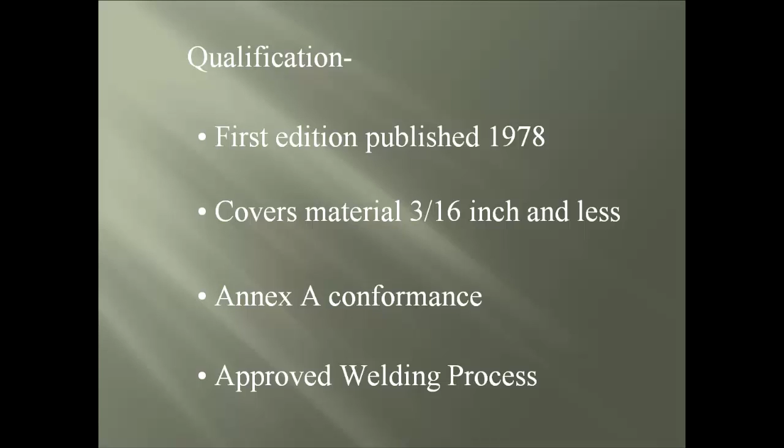The electrode for shielded metal arc welding process shall conform to the AWS A5.1 specification for carbon steel electrodes and the AWS A5.5 specification for low alloy steel. Now, if any other electrode specification is needed to be used, it must be approved by establishing a PQR.

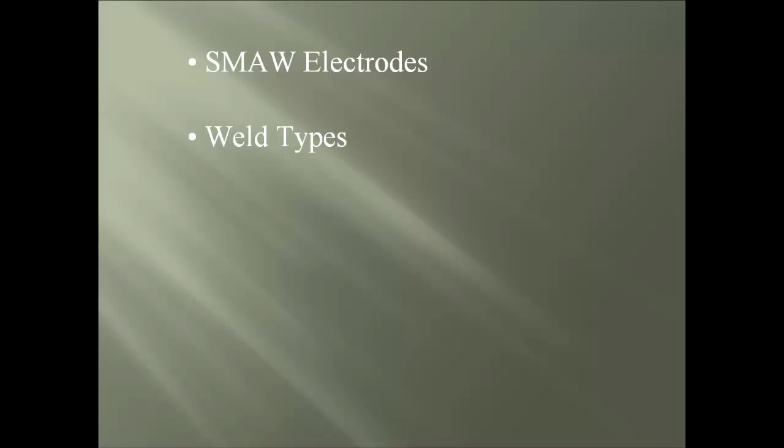The following weld types are approved: the square groove in a butt joint, fillet welds in a lap or T-joint, flare groove, arc spot, arc seam, and arc plug. The way to match the correct filler metal with the base metal being used is found in Table 1.2.

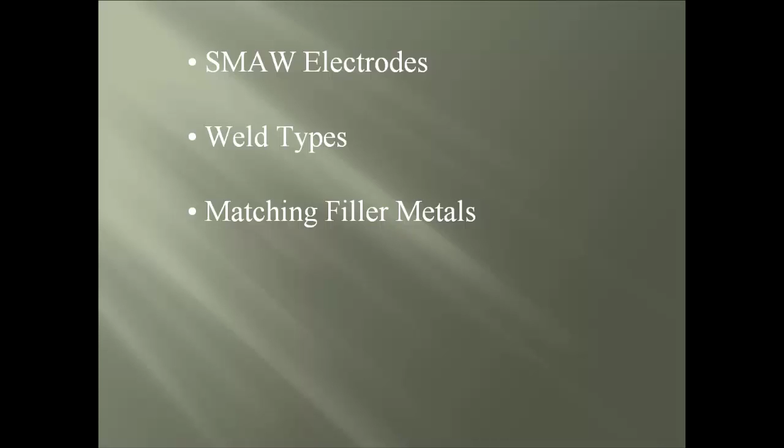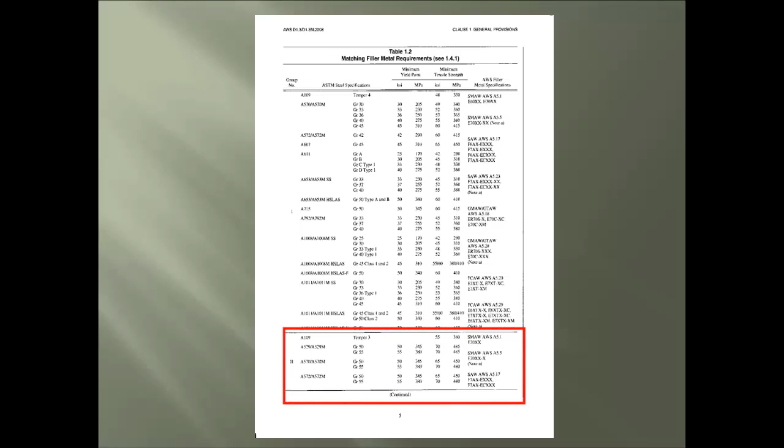Here we see the AWS Table 1.2, and we will take a closer look at this section of the table. The QC and QA professional needs to understand that these two parts of the table must work together for finding the correct information. So first is the grouping callout. And with the closer look, you see we are in group number 2, which is how the base metal is sometimes referred to.

Next, we see the actual base metal specification plus the grade for this group 2. Now a quick tip. You might have seen the same base metal found in another grouping, but slow down and check the grade, which will be different.

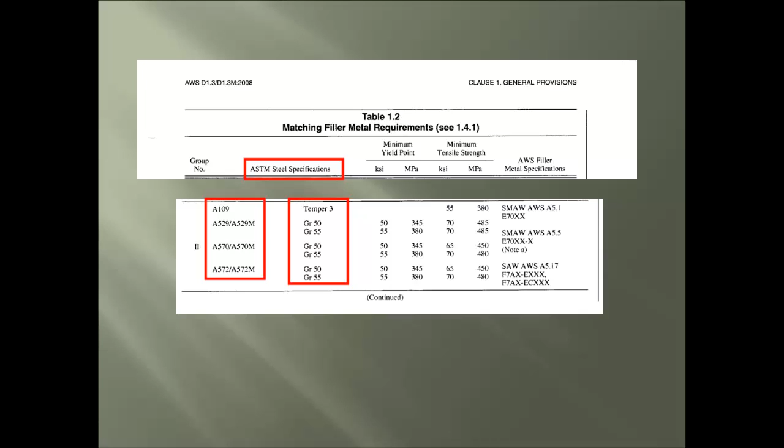Next is the two areas that cover the minimum yield point providing the KSI, which means kips per square inch, and the MPa, megapascals, numbers. And then the minimum tensile strength, also providing the KSI and megapascal numbers. And lastly is the filler metal specification and classification that is approved to be used with the base metal within this group 2.

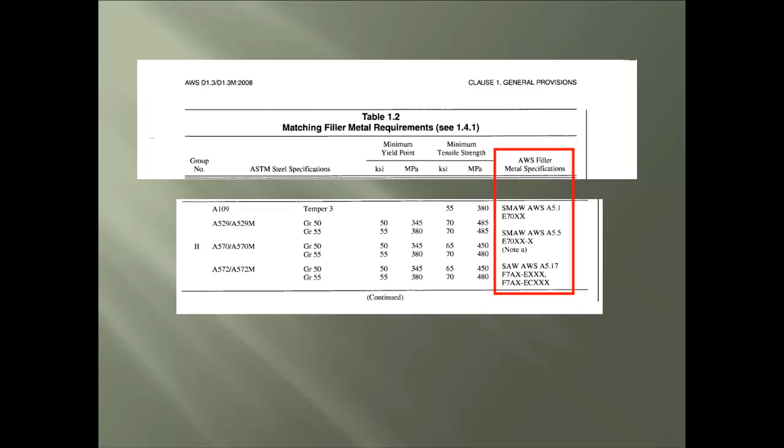Now let's cover some minimum and maximum for welding of sheet metal. First is the minimum length for a fillet, flare bevel, and flare V groove weld, which is 3/4 of an inch. Second is the minimum leg length of a fillet weld for a lap joint or T-joint, which is the thickness of the thinnest material used.

Third is the minimum fusion surface of an arc spot and plug weld, which is 3/8 of an inch. Fourth are the weld washers, which should be within 0.05 to 0.08 thickness. Fifth is the minimum width of an arc seam weld, which is 3/8 of an inch.

As we covered earlier in the seminar, a pre-qualified WPS is a written living document that includes the recorded values for each variable approved by the D1.3 code that will produce a sound weld assembly. Now, when the contractor does this, it's defined as exempt from a qualification test as long as the assembly is between sheet steel to sheet steel or sheet steel to a structural member equal or less than 3/16 inch in thickness. And if any deviation from the joint details approved by the AWS committee happens, this will have the proposed WPS needing engineer approval before production can begin.

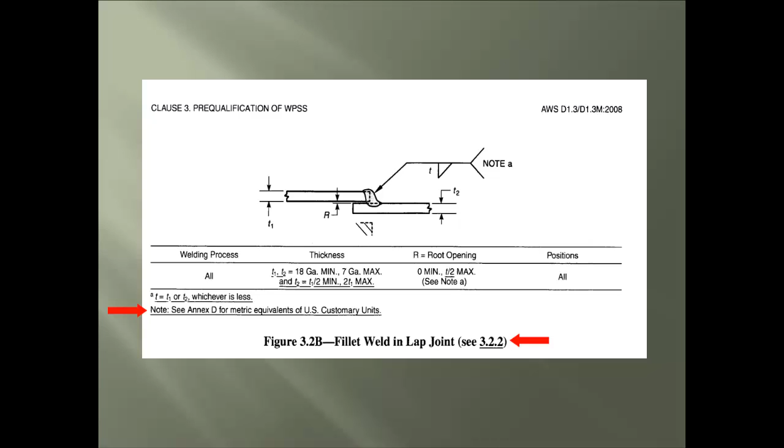Now we see even using a small detail like this, you must be heads up for any notes provided. And we close with the actual figure heading, which we see the numbers of 3.2.2 in parentheses. And this refers you back for a better explanation within the code for this joint detail.

Okay, we just reviewed the pre-qualified WPS, but remember, even with sheet steel, there are the PQR and WPS qualified by testing. Once again, the WPS qualified by testing is a written living document for each type of weld, which must comply with the AWS D1.3 code requirements, plus be accepted by the engineer of record. And the PQR is also a written living document that records the actual values used to establish the WPS qualified by testing.

Another quick tip: the melting rate data of a shielded metal arc welding electrode that is provided in the D1.3 code commentary may be used as a measure of welding current for both the WPS and PQR. Table 4.2 of the D1.3 covers the PQR essential variable changes. We have seen this table format in the segment for the D1.1, and the meaning is the same, which is, if any deviations take the parameters of a pre-qualified or a qualified by testing WPS out of the table's tolerance that are allowed, it will need to be re-qualified.

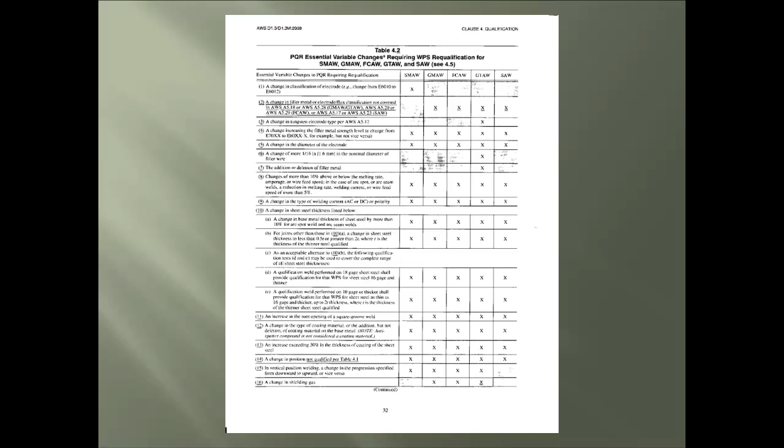This is a typical term confused with the qualification test. Remember, the qualification test is for the weld assembly, where the welder performance qualification is for the actual personnel. This qualification will establish the following with the welder: the welding process, electrode grouping, welding position or positions, direction of welding, and any specified conditions.

Plus, the performance test has the welder satisfying a number of tests and methods that, once passed, will be considered remaining in effect indefinitely unless inactive for more than 6 months or a reason for concern with the welder's ability is raised.

Here we review a test assembly for the welder's performance qualification. And we once again see the code call out for more information within the code found in the heading. Next, we see the actual configuration of the test assembly used. And here's the actual title for the joint assembly used. The type of destructive test required for qualification.

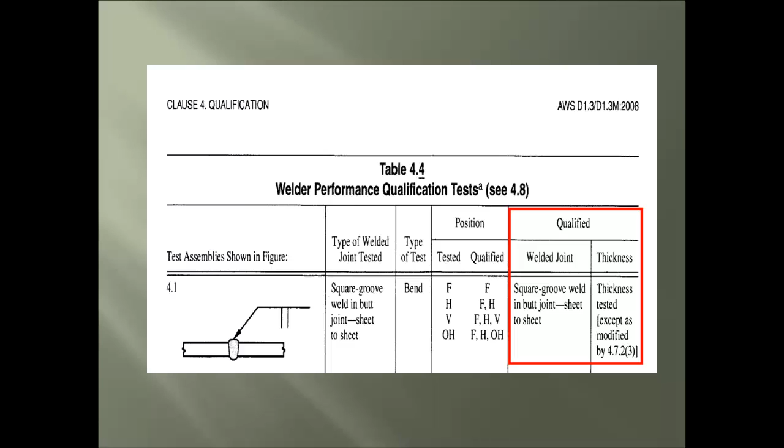We move into the second topic of this segment, and that is the fabrication for welding of sheet steel, with the first item covering the adequate weather protection during production welding. This one item includes the ambient air temperature, not to mention the base metal, plus the wind speed during the welding when gas metal and gas tungsten arc welding, plus flux core arc welding when using gas shielding processes are used.

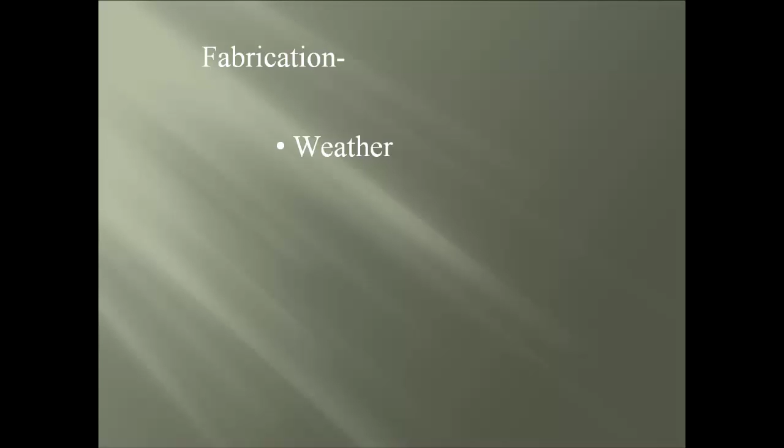Base metal surfaces are next, which should be free and smooth of cracks, tears, etc. that could affect the quality of the weld assembly. The third item is the joint, which should be arranged for the most favorable positions to weld. That includes the base metal being brought together as close as possible for complete fusion. And lastly, another quick tip is if the backing material satisfies ASTM A109 temper 3 or 4, it can be used without a qualification test.

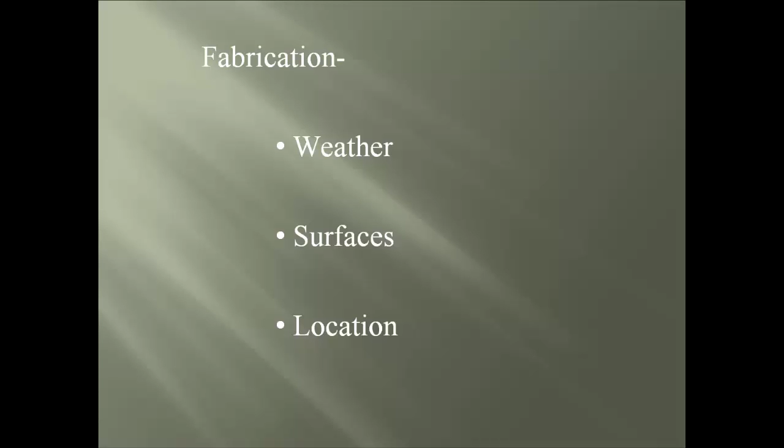And lastly is the third topic of this segment, which is the observation of the welding for sheet steel. First item is the acceptance criteria of the production welding, which covers the visual observation of the preparation, fit-up, and welding of the weld assembly, with issues as no cracks are allowed, no evidence of lack of fusion between the base metals, proper reinforcement height, correct accumulation of undercut, proper weld face shape, and compliance with approved documentation for location, size, and length of weld.

Next is the contractor's responsibility, which includes the proper approved WPS, whether pre-qualified or qualified by tests, plus welder qualification, and providing access to the work area with safe conditions. And lastly is the work itself. At any time during welding, a request of electrode melt rate, wire feed rate, or welding current can be compared to the approved WPS, and if the quality of the welder's work is judged to be below the requirements of the specification or code, a requalification of the welder can be requested.

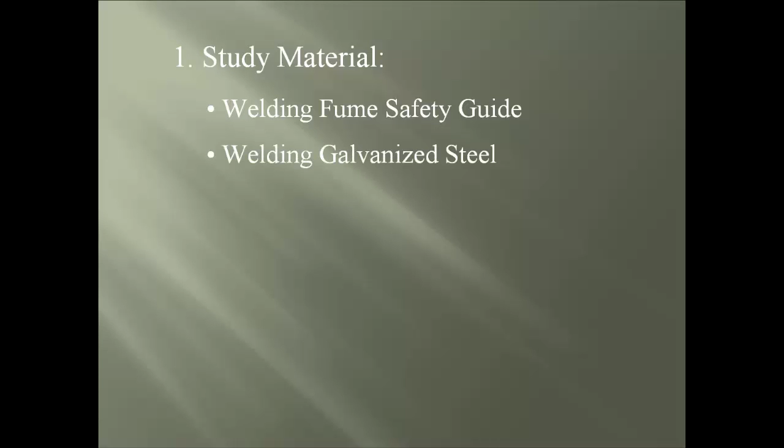Well, we have reached the study material for this segment, and you will be reading some very fine guides dealing with sheet steel. First is a safety guide dealing with the very dangerous fumes that are put off during welding. Next is the welding of galvanized steel, while finishing with the SDI manual for construction with steel deck.